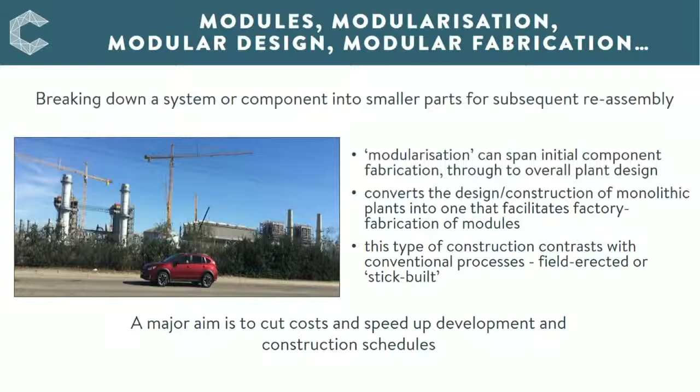Now, modularisation has been instrumental in driving many aspects of technological development and bringing in innovations and new skills into many areas of engineering, design and construction. This has led directly to improvements in plant safety, quality and efficiency. Its use has been growing steadily, but there can be practical limitations.

Despite efforts to standardise power plant design and production, no two are completely alike. There are going to be some site-specific variations that can include things such as coal type, physical location and so on. The past few years have seen a trend for unique one-off designs to be replaced, at least to some extent, by those that make a greater use of standardised, pre-engineered, pre-designed, prefabricated modular components and systems.

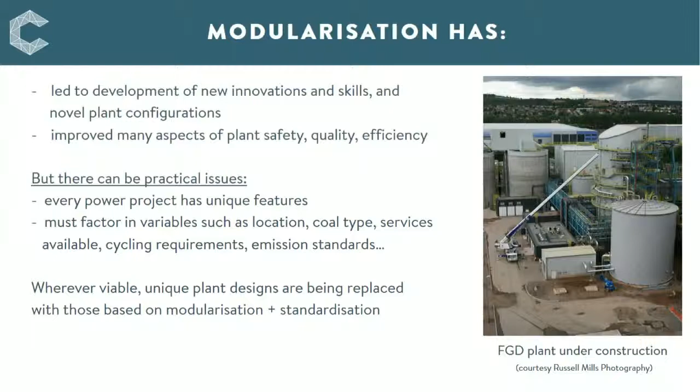And by way of example, the FGD plant shown here under construction is just one where modular techniques are being applied widely. Several hundred of this type have been built around the world, and modularisation is becoming an increasingly important part of that process.

Now, when it actually comes to building a power plant, producing parts and systems away from the work site can provide important manufacturing and cost advantages over assembly in the field. One of the biggest is that manufacture is carried out under controlled conditions. In other words, it's not affected by the weather and other outside factors. And largely to control costs and timescales, the power sector has been moving more in this direction. Now, the main advantages cited can include some, or even all of these, most of which are self-explanatory.

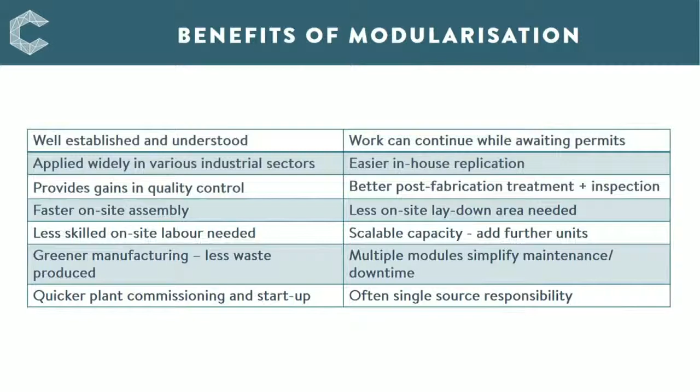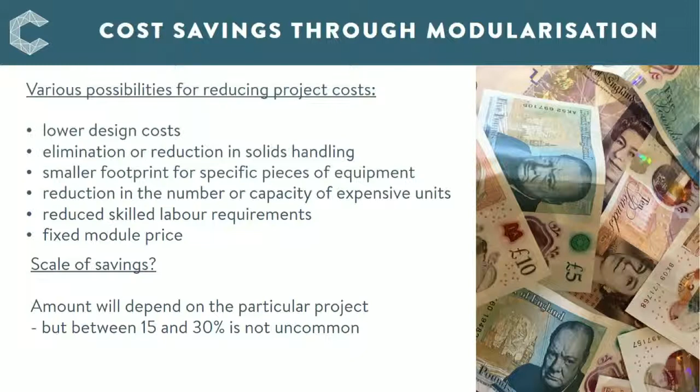So these are some of the possible benefits, but how does this impact on project costs? Well, modularisation can be useful in this respect. For example, it's sometimes possible to simplify a particular system, saving money both on design and equipment. And it's not uncommon for something built off-site in a module shop to cost perhaps 15–30% less. It also cuts down the need for skilled on-site workers. They can often be replaced with locally sourced labour, which is often cheaper.

So it all sounds good, but as with most things, there can be downsides. At the outset of a project, one of the first and most important decisions will be just how large are any modules going to be. As they get bigger, so do the practical difficulties of actually getting them to the worksite. There might also be financial implications.

The cost for a first-of-a-kind module can be higher as more upfront engineering might be needed, and potentially this could push up costs by perhaps 10 or 15%. But of course they're likely to be less for any follow-on units as the detailed engineering work's already been done. Similarly, procurement might be higher for the first unit.

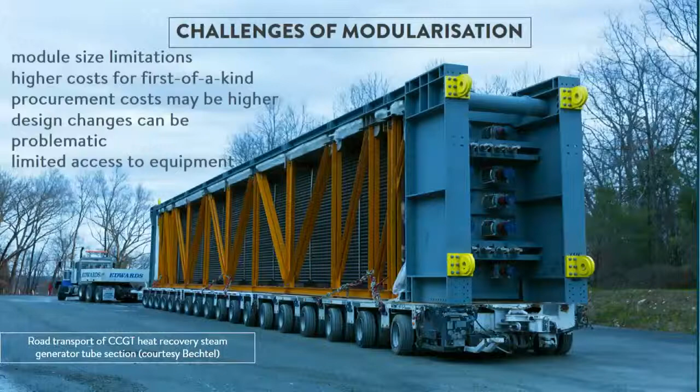And finally, as it's common practice to pack modules tightly with equipment, there can sometimes be problems as units age and maintenance or servicing becomes more frequent. In other words, it can be more difficult to physically get into them.

Now here's an example of just how modularisation has been used on a major project. This is the Prairie State Energy Center in the USA. The plant was built by Bechtel, and like most other developers, they tried to incorporate as much modularisation as possible into the plant. When it came online in 2012, it was the largest greenfield coal-fired power plant built in the USA since the early 1990s.

And modularisation played a key role in many aspects of its development. Its use was critical in controlling labour and project requirements and costs, and it also eased problems of getting materials and components to the site, a lot of which were moved by road or rail.

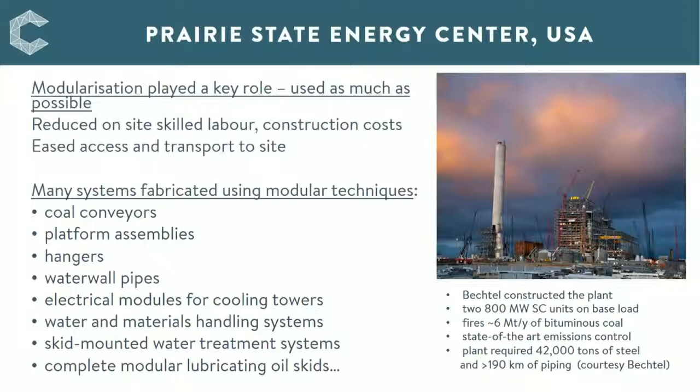Many plant systems were fabricated off-site using modular techniques, and these are just some of them. It all clearly worked, as the plant is still one of the cleanest and most efficient in the USA. And Bechtel are clear that the use of modularisation played a major part in achieving this.

Now let's look at some specific applications where modularisation can make a useful contribution. Well, modular construction has been applied increasingly to coal handling systems used for conveying, crushing, screening and so on. An increasing number of these systems are being built using standardised modular sections that allow them to be supplied and assembled and even reconfigured faster and more cheaply than more permanent structures.

For instance, there was a recent example in South Africa where a modular coal processing plant was delivered, installed, commissioned and running within the space of only a few weeks. Now, if we take coal washeries as an example, well, modular plants are now offered commercially, and the concept of building them largely from pre-assembled modules has been gaining ground steadily within the sector.

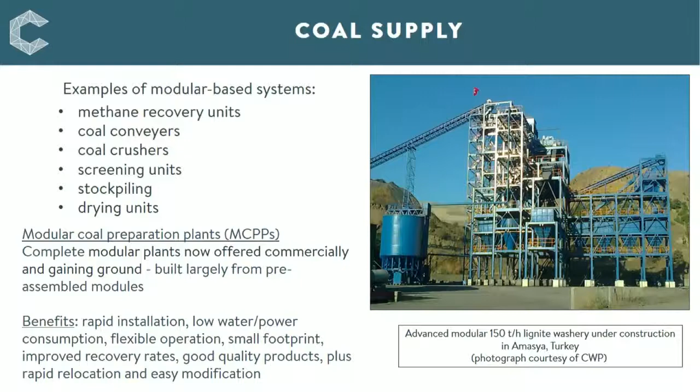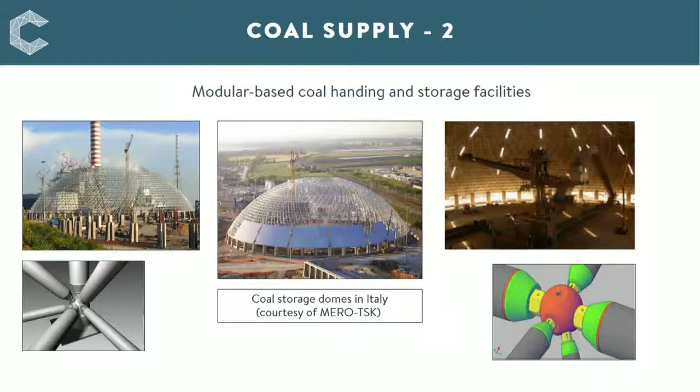They're based on a unique prefabricated modular construction system that simply bolts together. So assembly is fast and the need for on-site welding or fabrication is virtually eliminated. The techniques also apply to structures used, for instance, for the storage of gypsum for FGD plants.

Now let's move on and look at some actual power plant applications. Well, some modular techniques have proved to be well suited to power plants, although as we've heard, the extent of their application can vary significantly between projects. Compared to, say, a gas-fired CCGT plant, where these are often smaller and less complex. And with coal plants, it can be more difficult to modularise them to the same extent. There are likely to be more variables involved, and this can clearly complicate the process.

There are many parts of a typical coal-fired power plant that have benefited from modularisation, and this can extend from initial coal handling that we've just touched on, through the combustion process, right through to the back-end emissions control systems.

Now, from a purely practical perspective, it's unlikely that a complete power plant, particularly a large one, in its entirety could ever be fully modularised, but there are quite a few opportunities throughout much of the system. And in recent years, this is a concept that's been taken up in some shape or form by most of the major technology providers and plant developers.

Now, in some cases, because it can offer certain benefits, the use of modularisation has encouraged developers to opt for the use of identical smaller capacity units, operating in parallel, instead of a single large one. This sort of approach can allow overall capacity to be increased incrementally, as well as help reduce technical risks. So, in the event of a plant failure or unplanned outage, one unit can be taken offline as opposed to shutting the entire plant down.

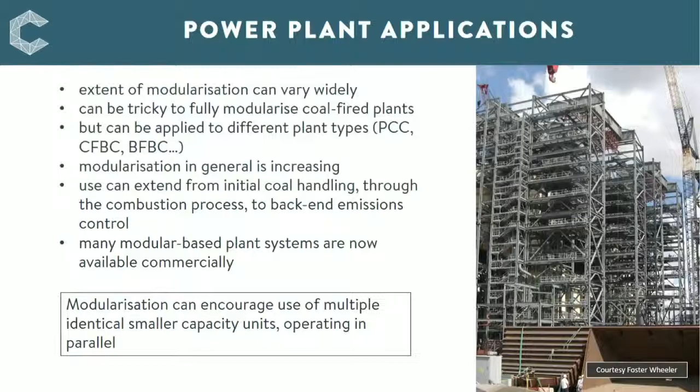Now, modular design and construction techniques can be applied to different types of system used to control plant emissions of the usual pollutants, such as SO2, NOx, particulates, and mercury. But if we take SO2 as an example, well, various designs of FGD plant are available from technology suppliers, and increasingly, modularisation is being used in their design and construction.

Some types of scrubber are now available in largely pre-engineered form, often made up of a number of major modules such as ductwork, absorber modules, vessel assemblies, and so on. And by way of an example, this is Doosan Lentjes' FGD plant under construction. More than 200 units of this type have been installed around the world, and modularisation and standardisation has played an increasingly important role in this. This hasn't been limited just to Doosan, as many other major manufacturers have also followed this route.

Advances and new developments continue to be made in the area of emission control in general, and wherever practical and cost-effective, these often feature modularisation in some way. The advantages often cited for the use of modular design and construction include the usual things such as compactness, ease of maintenance, reduced assembly and labour costs, plus rapid assembly and easy transportation. All useful items for plant developers and builders.

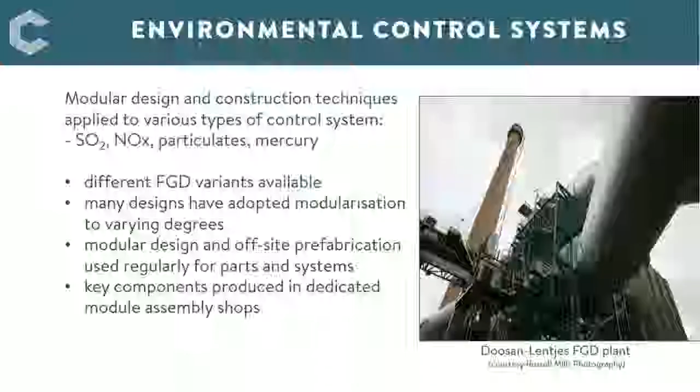And just before we move on, well, we've said a lot about modules, so these can range from quite small assemblies through to items such as this. I thought I'd show you just how large a single module can actually be. This is the largest heat recovery steam generator built remotely in the USA. It's 125 feet tall and weighs in around 4,000 tons.

It's shown here on its way down the Hudson River in 2017 to a new power plant in New Jersey. It was itself built up from 10 smaller individual modules. Building the unit in modular form in this way saved money and crucially also reduced construction time by about 7 months.

Now let's look at some interesting ideas for the development of small-scale modular power plants. Well, there's a general perception that to be efficient and cost-effective, coal-fired plants need to be big. However, this may not always be the case, and in some situations, smaller capacity units are more suitable. In some countries, these are already used quite widely, and some are based at least partly on modular design and fabrication. Many are in Asia, where they provide power to local communities or operate as captive power plants at commercial and industrial sites.

Now, even where coal already provides a significant proportion of the country's electricity, there are often perhaps more remote regions that still lack a reliable, affordable supply. In some cases, there might not be enough local demand to justify developing a large power plant, so a small unit is more appropriate. This can tick all the right boxes. As an example, this has been looked at for parts of Indonesia, and these are some of the benefits that were identified.

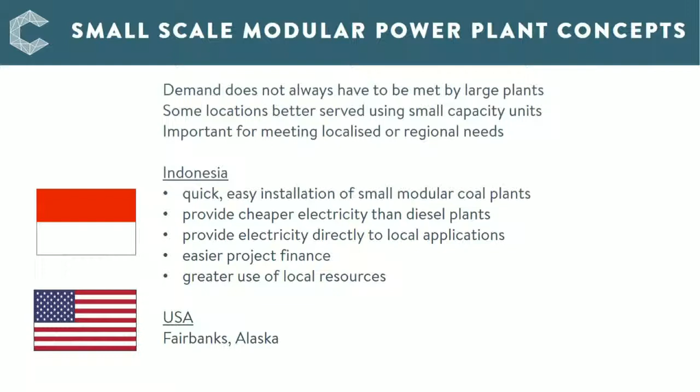Now, another low-risk benefit of using smaller plants is that if needed, capacity can be increased incrementally, simply by adding further identical units. This is an option that's frequently been used in India, for instance, where a lot of smaller capacity units have been supplied by BHEL, and wherever possible, they've increasingly gone for modular design and construction.

Operating multiple units rather than a single large one can provide a high degree of operational flexibility that can help keep plants operating under optimum conditions. And also because units all use the same technology, operators get very familiar with them. And finally, even if a single unit has to be taken offline, it's often still possible to meet demand.

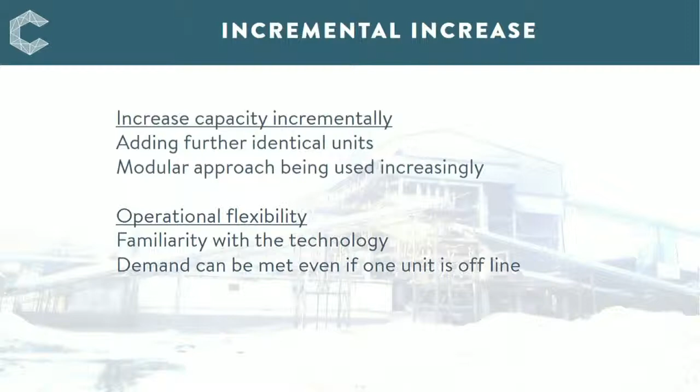Now, in the USA, the Department of Energy is looking into the development of small modular coal-fired power plants. As part of efforts to retain coal for power generation in the future, the DOE has instigated a program looking into the possible use of such plants, and as part of this is providing funding for 2 or 3 small modular designs. Potentially, these could have a significant impact on parts of the power sector.

The DOE is looking at potential markets for modular plants of between 50 and 350 megawatts, with an eye to markets both within the USA and overseas. Initial designs have been requested and should lead to the development of cost-competitive small modular plants that are efficient, operate flexibly, react quickly to changes in demand, and produce very low emissions. They'll also be expected to have the capability of operating at low load, have low water requirements, and be capable for base load or load-following operations.

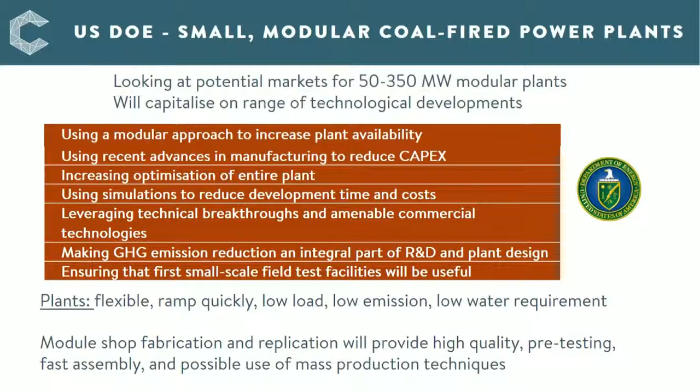Now, what sort of market potential are small modular plants such as these likely to have? Well, given the current market conditions, their potential in the USA appears to be somewhat limited, at least in the short term. However, they could prove to be an attractive option, particularly in, for example, some developing economies or places that are just too remote to connect to a national or regional grid. In fact, there are many such situations where access to a reliable, affordable supply of electricity is lacking.

For example, if you look at parts of Africa, many regions continue to suffer from extreme energy poverty. It's estimated that possibly up to 640 million Africans are still without a reliable source of electricity, something in this day and age viewed as a necessity for meeting even basic human needs. But of course, it's also needed to drive economic development. Africa as a whole has significant coal resources, and potentially it's likely that some of these could be tapped as fuel for small modular power plants.

At the moment, coal-based power is being viewed increasingly as an attractive option, and quite a few African governments are actively incorporating its use into their future plans and policies. Potentially, a significant market could open up for small, cost-effective modular plant designs coming out of the DOE program.

So where are we at the moment? Well, at the outset, the DOE received 30 responses from equipment suppliers, technology developers, universities, energy associations, and utilities. Early-stage technology design proposals have been requested, and it's expected that several options will be selected for further development. The DOE anticipates that suitable plant designs and cost estimates should be available within a few years, with the first plant designs being available probably by about 2022.

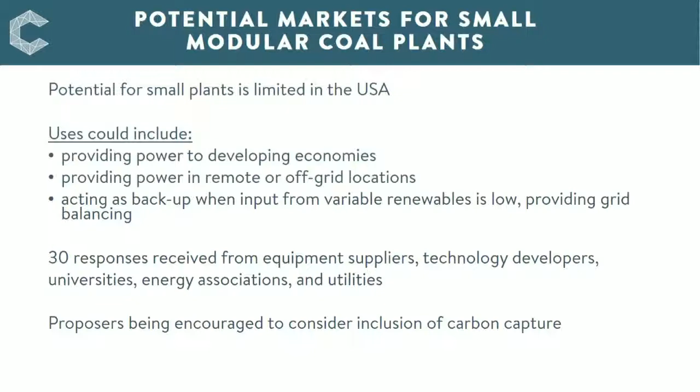Now, just to summarize things and bring them to a close. Well, modularisation is well accepted by the energy sector, and indeed now forms an important element in the design and engineering in general. Its use can allow plants to be built faster, cheaper, and of better quality. And this is particularly true when it's combined with the use of standardised design systems and components.

So what's been driving this process forward? Well, historically, much of the impetus has come from technology developers and EPC companies themselves. Although, as we've just heard, the US DOE is now actively engaged in this area. In recent years, many technology providers and developers have been operating in a tough marketplace, and this has led to the adoption of many cost-saving exercises, one of which has been the greater uptake of modular techniques.

Even though the extent of this can vary widely between projects and the pluses and minuses need to be considered carefully for each, it can often provide significant technical and financial benefits. Although there can be some disadvantages, these are often outweighed by the benefits. In reality, all new plant designs are likely to feature modularisation to some degree. And in addition, novel designs are also likely to open up new market applications and continue driving development further.

So to close, well, modularisation, especially when combined with other factors, appears to hold significant further potential for the future. Improvements continue to be made in the design and manufacturing techniques, and there's a growing awareness of the benefits it can provide. Wherever possible, engineering and industry in general, and that clearly includes the power sector, is moving more in this direction. And given the benefits it can provide, this is a trend that seems set to continue.

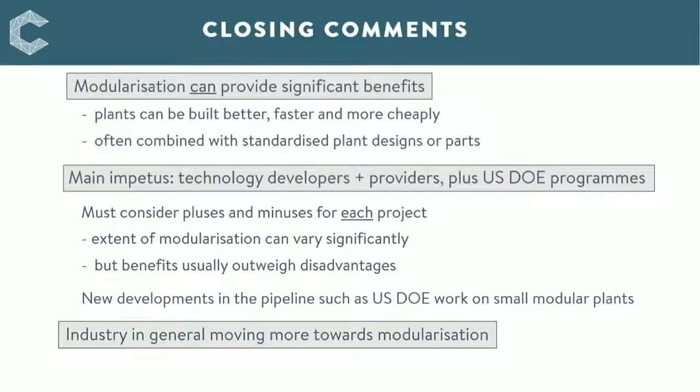You mentioned about modular systems being used for emission control. What's the situation regarding CO2 emissions from power plants? Yeah, good question. Well, as I mentioned in the webinar, modular design and construction techniques are often applied to various types of systems used to control plant emissions for the usual conventional pollutants, if we can call them that. As we mentioned, SO2, particulates, and so on.

As you might expect, there's clearly interest in reducing CO2 emissions from coal-fired power plants around the world, and this is an area where some interesting new techniques are being developed. Some of these are further developments coming from, for example, natural gas processing, whereas others are based on more novel ideas and concepts. Just like some of the other emission control systems we've spoken about, modularisation can be very useful, and potentially it can provide many of the advantages we've already talked about today.

In fact, in terms of CO2 capture, we've now advanced to the stage where a number of technology developers are offering complete modular carbon capture systems. This is on a commercial basis, and these plants come complete with process performance guarantees. But having said that, there's also other work alongside this with various modular or part modular systems being tested at laboratory and pilot scale. I get the sense this is only going to increase with time.